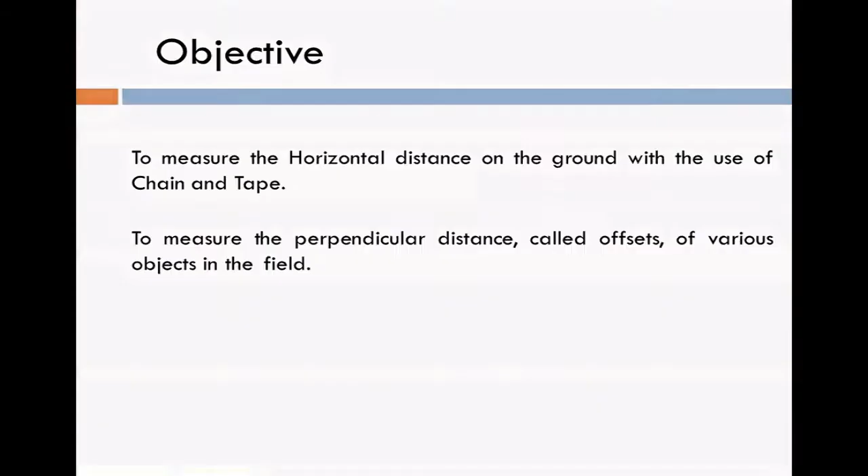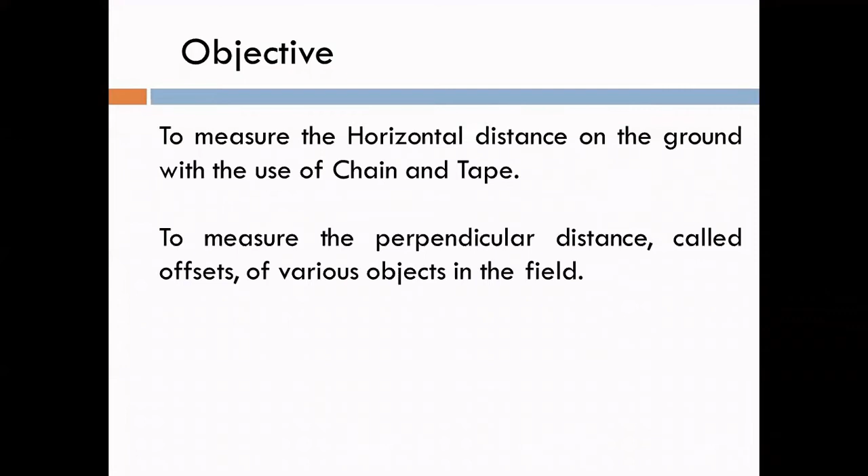First objective: to measure the horizontal distance on the ground with the use of chain and tape. Second, to measure the perpendicular distance called offsets of various objects. There are two types of offset: perpendicular offset and oblique offset. Offset means measurement of perpendicular distance between the chain line and any object, known as perpendicular offset.

Various methods of linear measurement: first, direct methods; second, optical methods; third, electronic methods. In direct measurement, the distance is actually measured on the ground with the use of chain and tape.

Second is optical methods. In this method, the distance is not actually measured in the field, but readings are taken with the instrument called tacheometer.

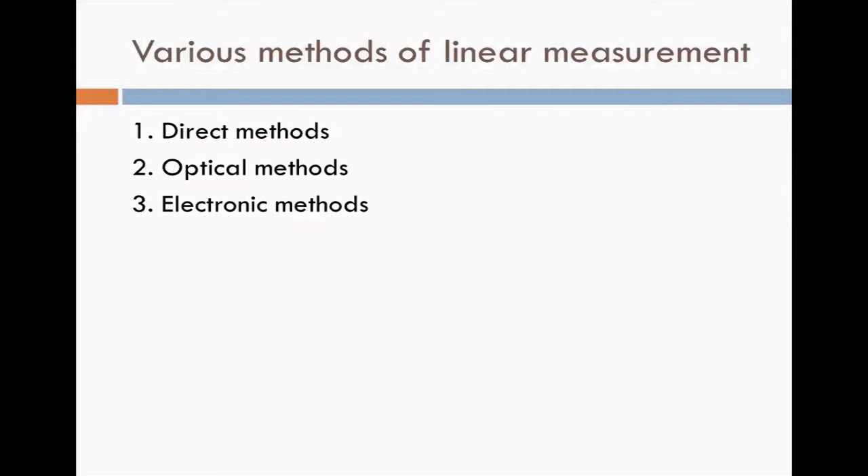Third, electronic methods, EDM. In this method, electronic distance measuring instruments are used for taking the readings.

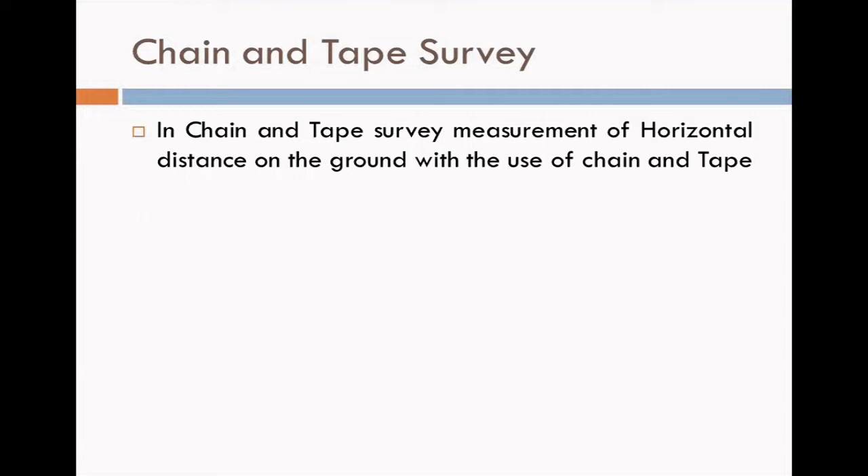Next, chain and tape survey. In chain and tape survey, measurement of horizontal distance on the ground is done with the use of chain and tape.

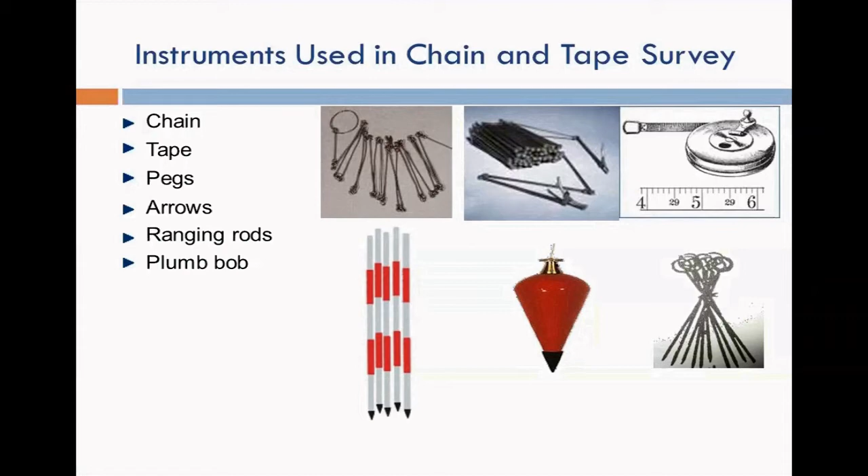Chain is used for measurement of horizontal distance on the ground.

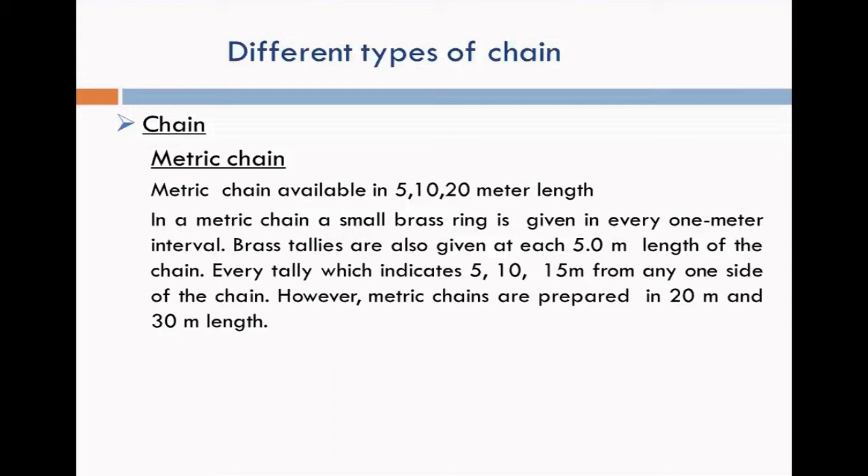Both ends of the chain have a small brass handle.

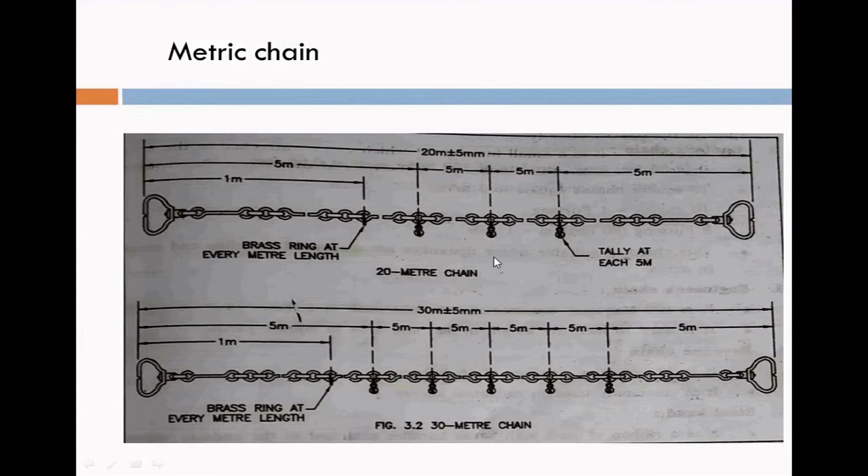At every 1 meter there is a small brass ring, meaning at 1 meter, 2 meter, 3 meter intervals. And at every 5 meter, meaning 5 meter, 10 meter, 15 meter, there are brass tallies.

Classification of tapes: depending upon the material used, tapes are classified as first, cloth or linen tape; second, metallic tape; third, steel tape; fourth, invar tape; and fifth, fiberglass tape.

First, cloth or linen tape. Cloth tape is made of woven linen and is 12 to 15 mm wide.

Cloth tape is light in weight and flexible.

Cloth tape is normally available in lengths of 10 meter, 20 meter, 25 meter, and 30 meter.

Second, metallic tape. Metallic tape is made of woven linen with small brass and copper wires.

Metallic tape is light and flexible.

Metallic tape is more durable as compared to cloth tape.

Metallic tape is available in lengths of 2 meter, 5 meter, 10 meter, 20 meter, 30 meter, and 50 meter.

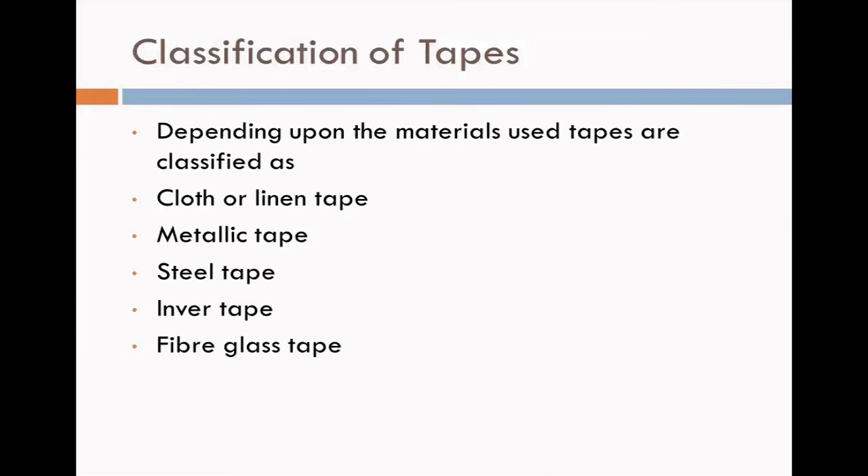Next, arrows. Arrows are used with chain for marking the end of the chain, fixed at the chain's end.

Arrows are made of steel wire, 4 mm in diameter and 400 mm long.

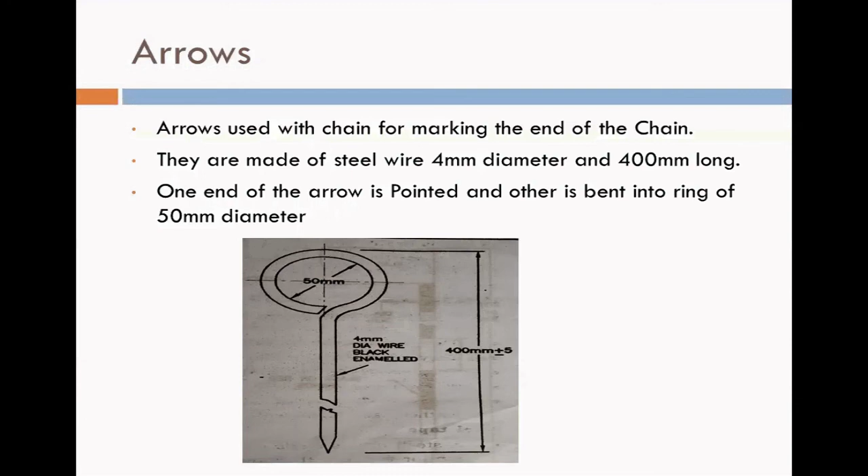See in figure: one end of the arrow is pointed and the other is bent into a ring of 50 mm diameter.

Pegs are 15 cm long and 2.5 cm square in section. Wooden pegs are used for marking the position of station, and iron pegs are also available in 1 cm diameter.

Peg is used for fixing the station on the ground. When survey is done on the ground, first select the station. Station means starting point and ending point, and at those points the peg is fixed.

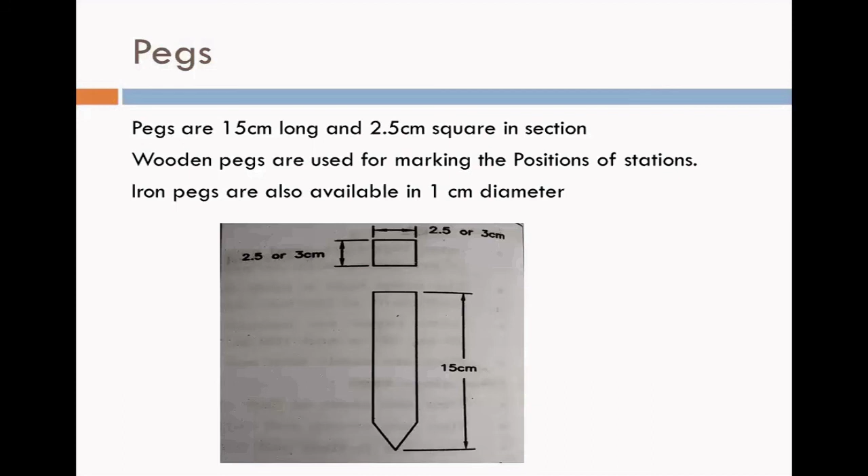Next, ranging rods. Ranging rods are used for marking the position of station and also for ranging the lines, and for fixing the station on the ground.

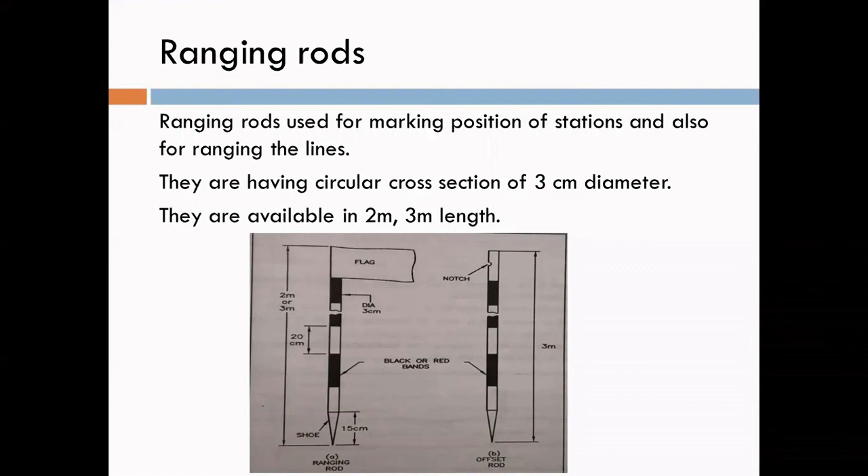In survey work on the ground, first select the station. Station means the starting point and ending point of the survey work, and at that point fix the ranging rod and peg. So the station is fixed on the ground with the use of ranging rod.

Ranging rods have a circular cross section of 3 cm diameter, and length of 2 meter and 3 meter. Color of ranging rod is red and white, and black and white, so it can be easily visible from a long distance.